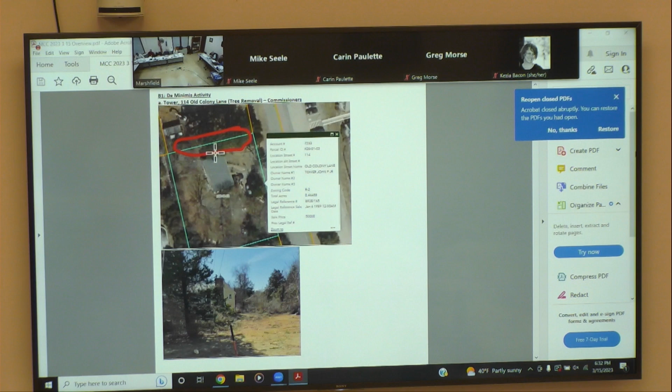First order of business is business item B1, 114 Old Colony Lane. Do you want to present that, Mike? Yep. So a tree service company was on site last week to cut a few tall hazard trees on the property boundary here, as outlined on 114 Old Colony Lane. There were 5 trees, all white pines. They were in poor condition, as I noticed on site. And the only resource area is land subject to coastal storm flowage. There's no tree policy, so this is kind of what we're left with at the moment.

Okay, any discussion among commissioners? I hear none. I'd like to make a motion to accept the de minimis activity of the tree cutting at 114 Old Colony Lane. Can I get a second? Second. All in favor? Aye. Joe is the second, Mike?

Perfect. And the second business item is a fence at 94 Marginal Street. Want to talk about that one, Mike? Yeah, are any of the Dorseys here? Hi, how are you? Would you like to speak about your project here?

Oh well, we're getting to the end, and we just wanted to put a fence down the side of the property line where it's marked in purple there, between us and our neighbor, because we both have dogs, and there's a break where it kind of bends a little bit. Our dogs go in their yard, which is not nice, so I was hoping to put a fence there. Just a 4-foot, not a picket, but like a flat top on it, just a 4-foot fence, down to where the reeds start.

Okay, your comments on that, Mike? I know the commission in the past has issued the 6-inch gap on the bottom of the fencing. The fencing would only be between the properties here and would not be restricting the property to the resource area. 4 feet tall. Check with the building commissioner for all other flood needs regarding the fence.

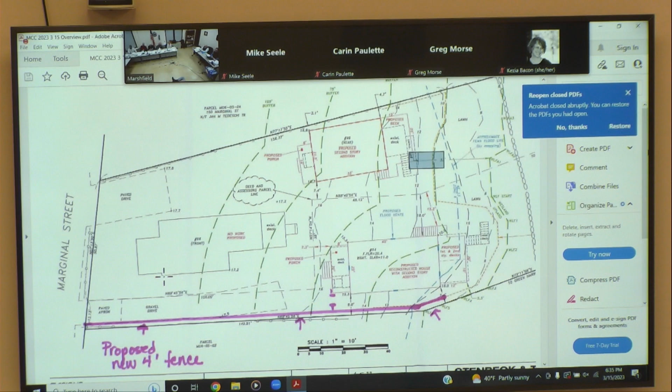Where are you talking about? Really, between the 2 back houses and all the way up to the driveways, everything has been dug up between trucks and trenching and everything else, so we need to reseed it all. It's just going to be a top coat of loam put on it to fill in the divots, and then we were going to put grass seed, but is there any requirement on what sort of grass seed we need? Previously disturbed. Yeah, it's existing lawn area, right? Yes. Okay, all right, great, thank you. Perfect.

Okay, moving into our hearings, we have a number of continuances. First one is 274 Foster Ave, SE 42-2958. They're requesting a continuance until June 21st, 2023. Make a motion. Have I got a second? Second. Second is Joe, all in favor? Aye.

Second one is 17 Oregon Road, SE 42-2990. They're requesting a continuance till April 5th. I'd like to make a motion that we accept that continuance. Have I got a second? Second. All in favor? Aye. Second is Ken.

And the next one is 1184 Ferry Street. I make a motion we continue SE 42-2987 until April 5th. Have I got a second? Second. Second, Joe. All in favor? Aye.

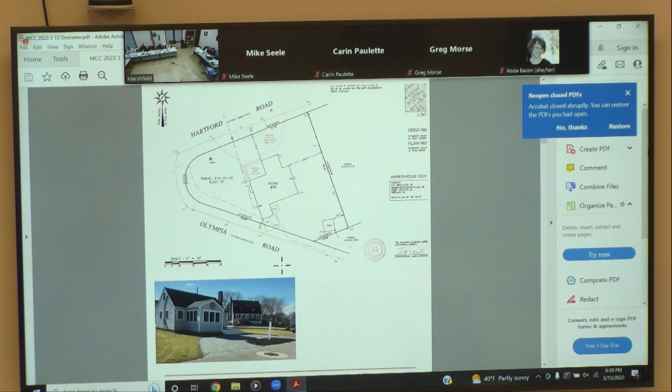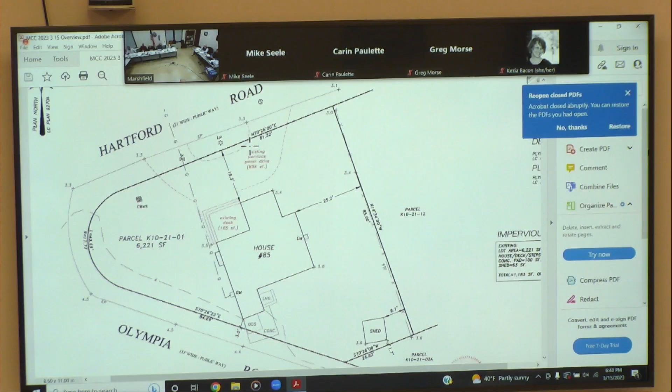You're here to present that, Rick? Yes, I am. I'm the hearing officer. As stated, Chairman, the homeowners here constructed a deck and a paver driveway on the property. They didn't realize they needed a permit for it, but the structures are already in place. The deck is 165 square feet. The driveway is a pervious paver driveway, but it's out there, it's 806 square feet. So they're in place, and he's been working with the building department. They've been through the floodplain permit process, but essentially they're here tonight filing this after-the-fact notice of intent for that unpermitted work. The only resource area we're in is the flood zone. There's no wetlands within 100 feet or any other that I was able to identify, other than the AE9 zone that they're in.

So here we are seeking an after-the-fact permit. Very good, thank you. Mike, your comments on this one? Taxes, fees, abutters have been met. The work is done up to code for the building commissioner, and the only thing they were missing was the permit to start off, and commission approval. So other than that, it looks like a decent project.

I took a quick look by there, lot's dead flat, no issues there. Did we verify their pervious pavers? Yeah, I verified on site that there was adequate gap between the pavers, and there's no standing water on the actual driveway. Thank you for verifying the requirements for abutters and everything. I forgot that. Comments from other commissioners?

I see none. I visited the site, and as Rick described, it's pretty straightforward. Any comments from the public on this one? I hear none. I'd like to make a motion to close the hearing and issue special conditions. Anything outside of the ordinary, Mike? Nope, just the standard special conditions. Very good. Have I got a second? Second, Susan. All in favor? Aye.

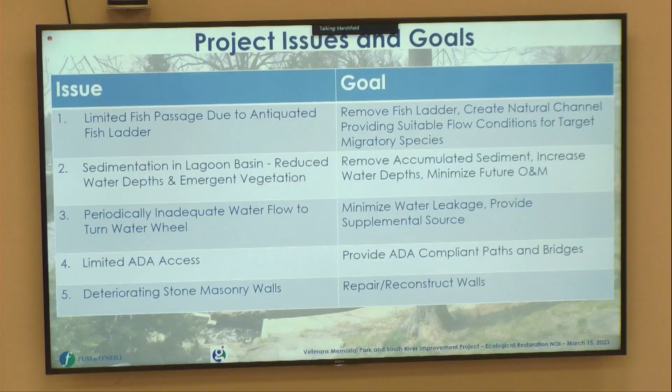So with that, next slide please, and I think Leslie will speak about regulatory.

All right, so as you heard at the beginning and from Bill, this is being proposed as an ecological restoration project. DEP enacted new regulations for ecological restoration projects about 5 years ago, so it's probably pretty new to the commission. In fact, we've worked only on one other ecological restoration project together. We're getting into more of them, but it's been a learning process for us, as I'm sure it will be for you guys.

But one of the things you have to prove before you can present your project as ecological is that you meet the definition within the regulations of an ecological restoration project. That is essentially that you are restoring ecosystems to an area that have been anthropogenically altered. That's the basic definition in the wetlands regulations.

So this project definitely does that, because the dam was put there years ago with the historic grist mill and has impacted the area and the ability of the fish to pass up the river. So I wanted to go through for the commission and describe how this project meets the requirements for an ecological restoration project. Those are presented in the regulations in 310 CMR 10.13(1)(a) through (l).

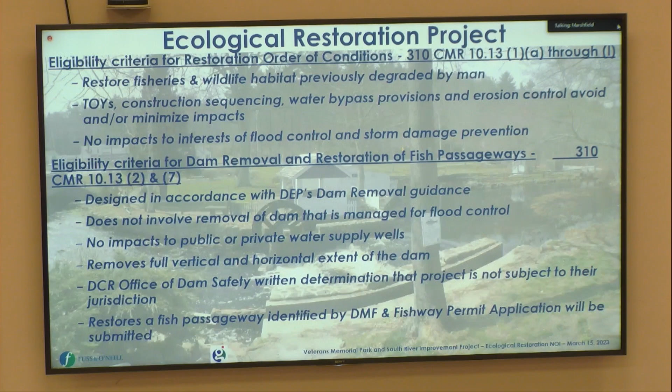Other things we're doing to avoid and minimize impacts: construction sequencing and water bypass provisions that will allow water to flow during all parts of construction, and then erosion control and sedimentation control that will minimize sedimentation into the river. One of the other requirements is that the project can't have any impacts to interests of flood control and storm damage prevention. The project does not propose to alter the water levels in the river to the extent that it would alter the flood control and storm damage prevention of the banks on the sides.

In addition to the general requirements for eligibility for ecological restoration, projects also have to meet specific requirements. So this project meets 2 specific types of ecological restoration project requirements, one for dam removal and one for restoration of fish passageways. I've listed here all the requirements that we meet.

It has been designed in accordance with the DEP's dam removal guidance. It doesn't involve the removal of a dam that's managed for flood control; the dam was essentially put in there for the historic grist mill, not for flood control. There will be no impacts to public or private water supply wells. We are proposing to remove both the full vertical and horizontal extent of the dam.

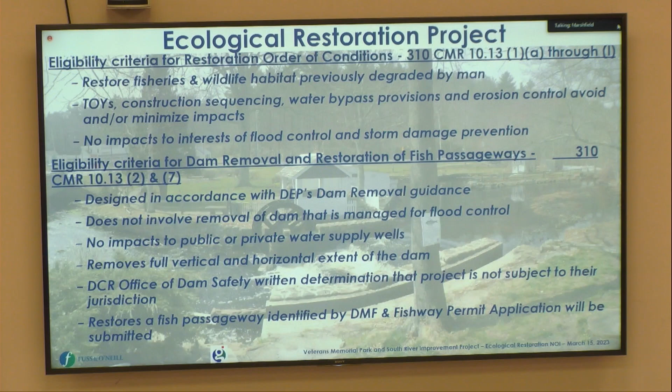We're required to get a written determination from DCR's Office of Dam Safety that the project is not within their jurisdiction. We got that letter, it's part of the application. We're also required to show that we're restoring a fish passageway identified by DMF, which it was, and that we will be filing this fishway permit application. I know that was a long-winded way of describing it, but it's important as a learning tool, and also to demonstrate that this is truly an ecological restoration project that meets all of DEP's requirements, so that you can issue that restoration order of conditions.

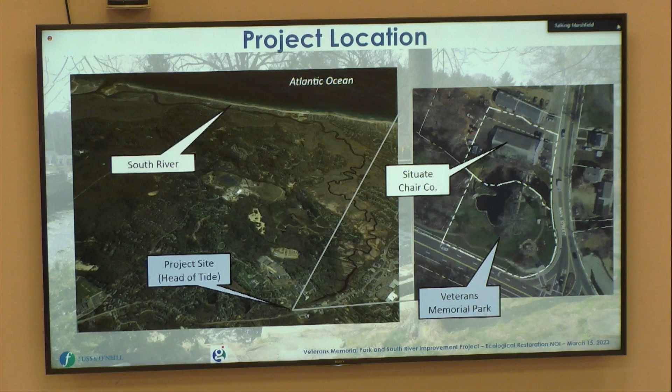Next slide please. Okay, just in terms of orientation, everybody knows where the Veterans Memorial Park is, but you can see it's on the South River, first barrier, coming up at the intersection of Main and Beach Street. Please, next slide.

Okay, so this is an overview of the way water flows through the park. Going from the top left image of the upstream section of the river flowing down, there's a split, and the main channel continues down towards the fish ladder and dam spillway, but there's an uncontrolled lagoon inlet channel where water may flow into the left part of the lagoon, the half-heart-shaped lagoon. It can then flow out of the lagoon in either of two ways, depending on water level and flashboard management by the veterans. It can either flow back into the channel through the bottom of the heart, or it can flow out through an 18-inch reinforced concrete pipe outlet with a flashboard stop log controlled at the inlet at the lagoon.

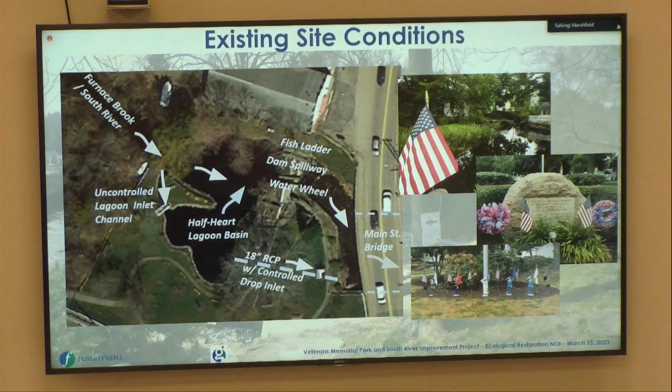Water flowing out of the lagoon and down the river channel approaching the spillway can go over the spillway, through the fish ladder that currently exists on the left bank, or through the flume for the water wheel. Continuing down, everything merges from any of the 18-inch discharge under the Main Street Bridge. Next slide please.

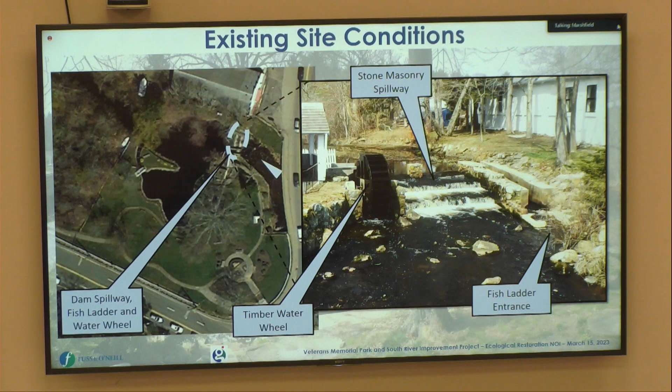Okay, just another orientation to show the configuration of the fish ladder. You can see the fish ladder on the right-hand side of the picture, that's the entrance. It's a very narrow, small, old-fashioned fish ladder, and it doesn't work very well, as we noted. You can see the stone masonry spillway, the tiers of the falls through the spillway, and on the left side, the timber water wheel with the flume in the back of the picture. Next slide please.

Again, just another perspective view. This one was taken during low water, during a drought a few years ago, so you can see the composition of the spillway. You can see the void forming in the portion of the spillway, the stone masonry wall supporting the water wheel. That's an example of the type of deterioration that the project is intended to address, that and other defects and deterioration of the stone masonry wall. So, next slide please.

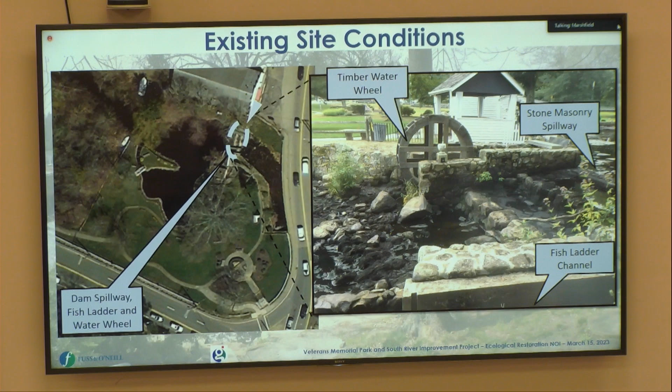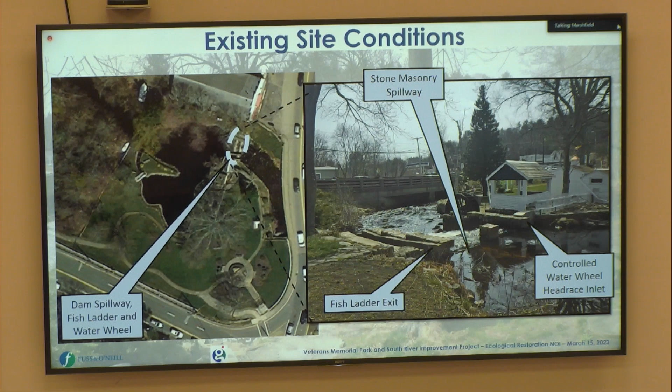Again, just another view looking downstream towards the bridge. Same interface, same controls. There are flashboards currently installed at the spillway to manage water levels during the migration season. The town has been operating those flashboards and water controls that exist now in concert with an operation plan developed by the Division of Marine Fisheries. The veterans are there to implement those controls seasonally and per flood conditions to enable and facilitate the operation to the extent that the fish ladder can pass fish. We've also developed an operation and maintenance plan together for the controls that we've incorporated into our project, which will likewise be implemented by the park trustees, and has also been developed in concert with Brad Chase at DMF. Okay, next slide please.

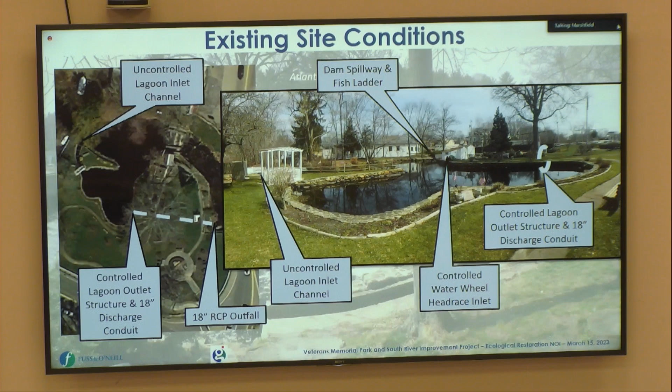Okay, so now just another perspective here visually to show the heart-shaped lagoon. You can see the 18-inch discharge conduit on the right-hand side, the position of the water wheel head race intake, spillway and fish ladder in the background, and the lagoon inlet and white bridge on the left-hand side of that picture. Okay, next slide please.

All right, this slide depicts the wetland resource areas. We essentially have four different wetland resource areas. The areas shaded in gray are land under water bodies and waterways, which includes all parts of the river and the heart-shaped lagoon.

We've got bordering vegetated wetlands, the areas hatched in yellow on the left side of the slide, which are wooded swamp type BVW. Then we have emergent marsh downstream of the dam, near where the river goes underneath the Main Street bridge, that little green hatched area. That's also BVW emergent marsh.

And then we have two types of bank. We've got a coastal bank and an inland bank, and I'll describe that. The coastal bank is that large yellow area on the north side of the river downstream of the dam. That's a coastal bank because that area is influenced tidally during very high tides, spring high tides, and storms, so that part of the system is considered coastal.

The bank areas on either side of the river, and on the north side of that little peninsula where the bridge takes you to that island, those are inland bank areas. There's a sliver of that inland bank that continues along the north side of the channel upstream of the dam. So those are the wetland resource areas we have.

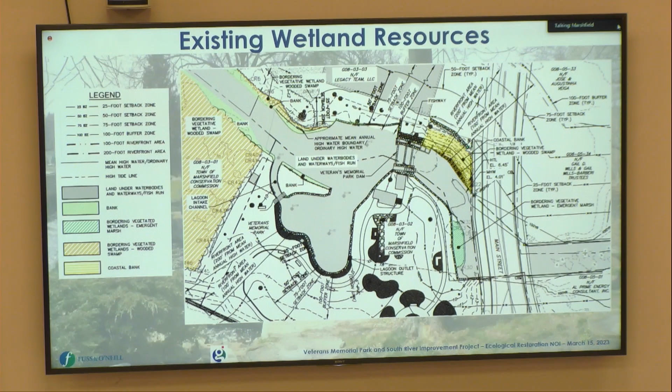Nils is going to talk a little bit about what we're proposing, and then we'll finish up with impacts to these resource areas and how we're going to restore them.

So basically what you're showing is that almost the entire area is within some sort of resource area. Yes, that's absolutely true. We've also got riverfront area, 200 feet from the mean high water—it's on the plan—and land subject to coastal storm flowage. And we've got the buffer zone as well. Thank you.

The reason for showing this is that essentially we're going to have, in the dark green at the bottom, a series of nature-like boulder weirs and pools. The way we design that is to create the flow conditions that will support migration of the target species.

Herring, alewife, and other fish upstream—those fish are able to swim at a certain velocity for a certain distance, and they require a minimum depth of water. So our design approach is to look at the seasonal range of flows during the upstream migration season, from March through June, statistically. We determine the low flow condition, the high flow condition, and through modeling analysis we determine the shape, elevation, and position of these weirs and pools so fish have a resting pool to stop, then migrate up through the next weir, continuing in a stepwise fashion, similar to baffles in a fish ladder, but more efficient.

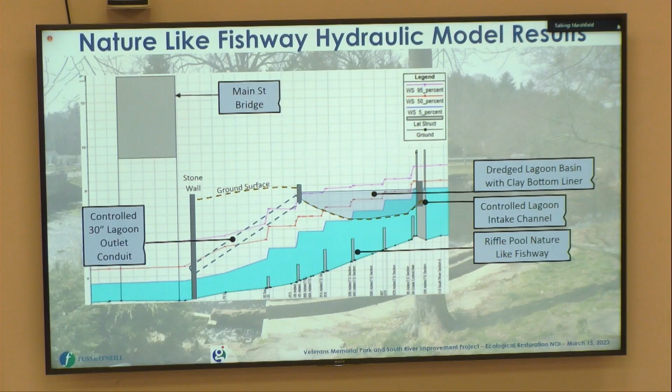Now, I probably should have shown you this one first, but anyway, here's the weir and pool system. We have a series of weirs and pools, boulders nested in there in a random, nature-like fashion, which again provide little places for the fish to stop behind a boulder and rest until it can move up during those higher velocity flow conditions.

As the fish come up the channel underneath the bridge, we want to make sure they're able to get to the first part of the fishway, which is why we created what we call a low flow entrance channel. When we did the modeling, we saw there wasn't an adequate depth of water if we didn't do anything to the river channel downstream of our fishway during low flow migration conditions. So we're shaping that so that during low flow conditions, the fish will have an adequate depth to get to the entrance of the ladder.

We also don't want the fish to get confused by water coming out of the water wheel. We want them to know that this is the way to go to the spawning grounds, and by providing that low flow entrance channel, we'll be able to do that.

So the other element here is that we're introducing a number of flow controls, and I'm going to try to use words to describe what I'm talking about. Otherwise I would point to where it is, and I can stand if it would help—it wouldn't help the people at home.

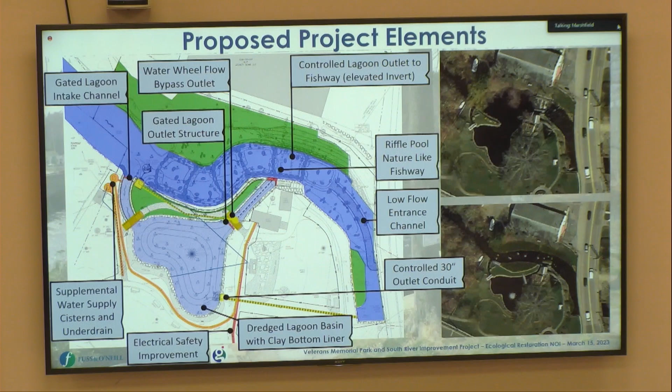Okay, thank you for pointing that out. So this is another rendering we've developed to show what it looks like now and what it will look like in the bottom right. You can see the peninsula gets extended, there's going to be natural vegetation on the banks, and those are going to be seasonally flooded banks. Then, of course, the boulders and riffles coming down through the channel, and the water wheel maintaining its flow. The two bridges are added, and you can see the fountain in the background.

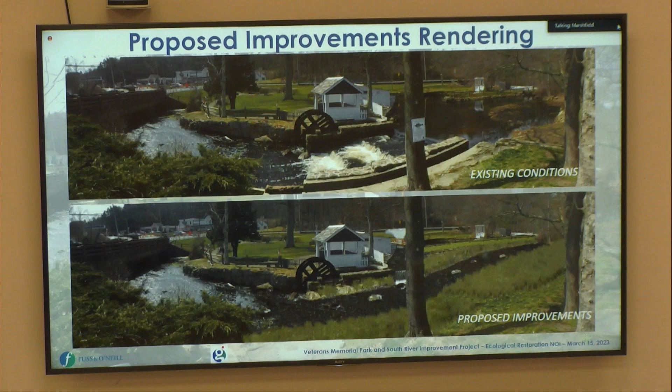All right, so we broke out the project into different elements. We looked at a number of different alternatives to address the issues and goals that are part of the project. For the river restoration and ecological benefits, doing nothing doesn't serve any benefit. Removing the dam and the fish ladder with no fish passage improvements would essentially lower the whole profile of the river, drain the lagoon, and these cultural resources would be lost. So that was a non-starter from the get-go.

Removing the dam and fish ladder and constructing a roughened channel—essentially a different type of channel as opposed to a weir and pool system—you could try to create a bouldery channel that still allows fish to migrate upstream. But when we ran the modeling on that, we found that no matter what we did, we couldn't get the hydraulics to meet the capabilities needed for fish swimming upstream, unless we built this weir and pool system, while also meeting the concerns and needs of the veterans and the trustees. We spent significant modeling time trying to make that work, but it just would not work.

If we're investing millions of dollars to do this project, we want confidence that it will work. We feel very confident in this system—there are many nature-like fishway channels throughout New England, and I could describe them or show you where you can go see them. So that's the first project element, and why we propose this alternative 4.

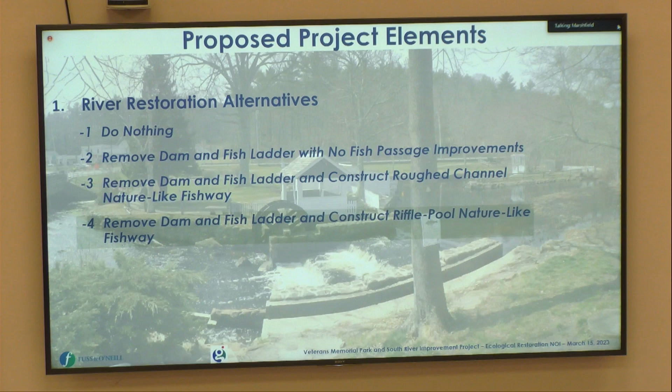Okay, next slide please. Lagoon water conservation alternatives. What I've done here—the shading is a little slight, but those are the elements we've selected for inclusion in the project—these are all things that enhance the ability to conserve water. We looked at them and asked: what are the costs, what are the benefits, what are the impacts, and does it make sense to include them?

First is dredging the lagoon. Of course we want to do that—it'll allow us to install a new liner, and when we get down to item 5 we'll talk about that. When the lagoon is dredged, what do we do with the material? First, we want to put it back wherever we can on the project. That's a beneficial reuse, it's low carbon, and we don't have to haul it anywhere. We can incorporate it into the native substrates we want to create in the river channel and on the banks of the river channel.

We also want to look at where it can be beneficially reused offsite. We've talked to the town and the DPW, and understand that material would be able to be beneficially blended into the composting facility. We've done a characterization of the sediment to assure it would meet the criteria, which it has, so that would be part of the project proposal.

We have, as I noted, replacing the existing and additional water control structures. All of those flumes, gates, and stop log structures are there to allow the trustees to adaptively manage the project beneficially under whatever climate conditions come up.

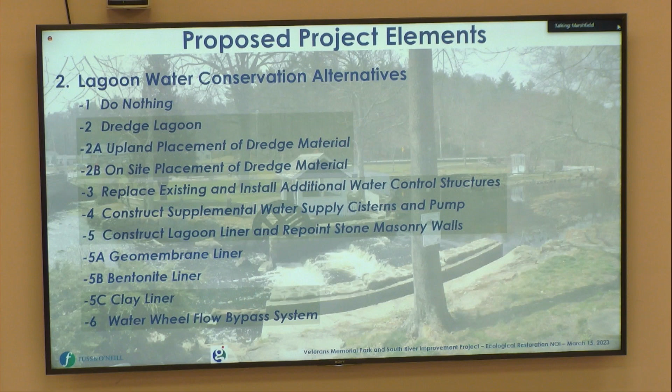When we talk about park access, safety, and aesthetic improvements, doing nothing was dismissed. We want to improve everything, which we did by extending the peninsula, constructing ADA accessible bridges and pathways through this new portion of the project site, repairing stone masonry walls in danger of collapsing, and replacing the outdated electrical system and installing a new primary service electrical conduit while all the construction equipment and resources are mobilized.

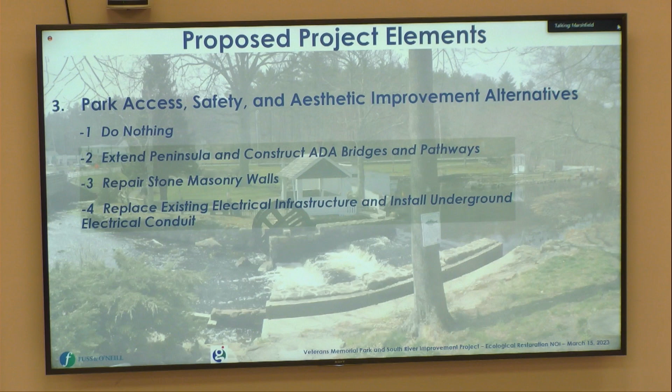This is a couple slides to represent the phasing of the construction to be able to manage the water flows through the river and allow the work to be done in a safe and protective way for the environment. The first phase would entail installing a temporary access causeway with flow bypass conduits. This will be like trap rock or stone placed across the river channel with conduits that allow the flow of the river to go underneath or through this causeway.

With the access coming from the Scituate Chair Company, we've had numerous contacts with them to talk about getting access through their property during construction. They've been very helpful. We've heard their concerns and addressed them in what is being proposed here. So we would come from that side of the project site and drive across this causeway to get to the lagoon and construct all the lagoon improvements.

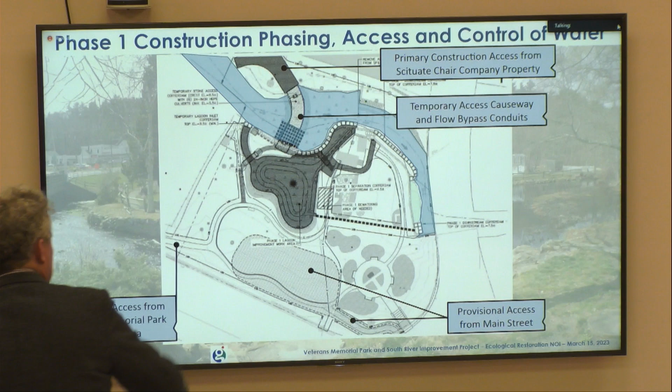With these temporary cofferdams—I don't call them out, but essentially these structures here would be a cofferdam system that would keep the water from flowing up into the areas where the work is occurring.

We have provisional access from Main Street. Again, we want to provide as much redundancy in the access, because we have a very short time of year window. It's very important that the work occurs efficiently, so we're trying to create numerous ways for access, coming in from the existing parking area with protection for the ground, and then from the intersection at Main Street into another provisional staging area. All these areas would be restored to their pre-construction condition upon completion of the work.

This phase of the project would install that 30-inch conduit from the lagoon to the bridge, and it would repair a section of the stone masonry wall that is leaning downstream of the water wheel, which is why we have that cofferdam in that portion of the project site.

Obviously, if there's a flood, the water's going to go over all the systems we have in place. We're going to pull out and come back when the water recedes. This is not intended to protect the site under all conditions—it's simply to assure the work can be done under normal seasonal conditions, and of course not affect the Scituate chair.

So on the next slide, we're going to flip the project over. Now everything has been done on the upstream side, and we're building a cofferdam at the upstream end, putting the water through that flume for the intake to the water wheel, and constructing the nature-like fishway within the river channel itself. We're removing the dam, removing the fish ladder that's out there now, and constructing the new river channel with weirs and pools and bank areas that will allow migration of the target species.

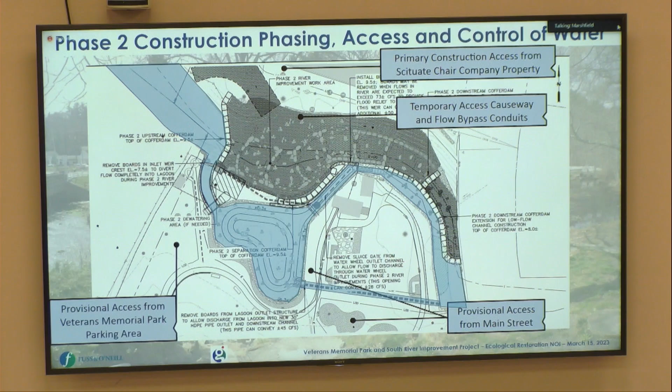All right, we are almost done—2 more slides. Once we've done all the construction that Neil's just described, we want to restore the habitat areas. This slide shows those riparian habitat restoration areas, and we have 4 different areas. The first one is the upper riverbank restoration area.

That's the area shown in light yellow all the way at the top on the northern side, up on the Scituate Chair property. Each one of these 4 areas has a different planting plan designed for the elevations and habitat that particular area will serve. So in that area, we've got red maple.

It's all listed on sheet 11 of the plans. I'll just hit some of the highlights. So red maple, elm, black willow. We've got a number of shrubs, and then we've got a restoration seed mix in that area.

The next area is the riverbank stabilization area, shown in orange. It's on the north side of the river, north of where the dam used to be. In that area, we've got specced out black willow, silky dogwood, a wetland seed mix. As we move further up the bank, we've got swamp rose, conservation seed mix, and another bunch of plants: winter holly, silky dogwood, highbush blueberry, and a conservation seed mix at the upper edge of that slope or bank.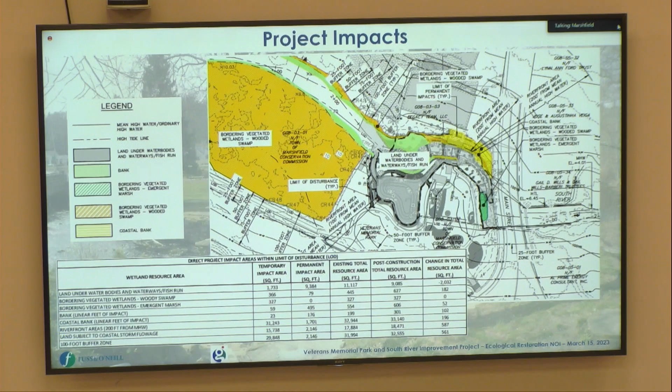And Mike, I think that's the last slide. Do you agree? Yes. Yep. Okay. All right, thank you. So I'll open it up to questions from the commission. Great.

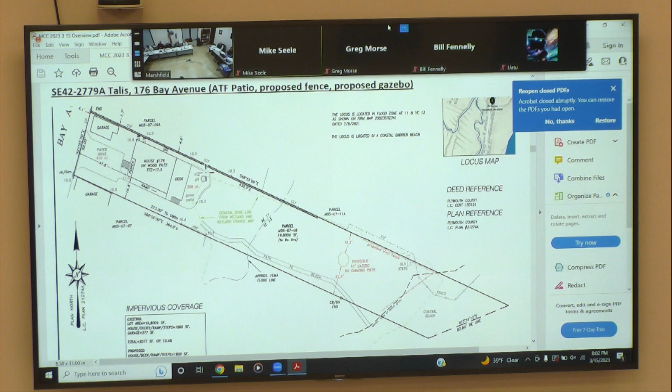We're amending the order to include this paver patio that was put in behind the deck. There was a fire pit on top of this paver patio that's out there. I understand it's pervious. We quantified that area at 568 square feet. It wasn't, I guess, part of the original permit for the construction of the home, so that has been put in place.

That's the area. As part of amending this, Mr. Talis thought, while we're at it, he wanted to propose this gazebo out to enjoy the beach views, and a section of fence out by the edge of Burke's Beach, to kind of supplement an existing fence that's already out there.

The gazebo, as you can see, is positioned on the lot in that fashion. It's a 10-foot diameter gazebo, set on diamond piers, as shown on the plan. The section of fence is also in red. It's a proposed vinyl fence that runs along the northerly boundary line opposite the gazebo, then runs southeasterly towards the beach, and then cuts across.

The purpose of that is dual: to protect the dune and also keep people from coming up from the beach and going onto the property, which seems to happen quite a bit in the summertime—people walk through there and do different things. So essentially we're hoping to amend the existing order to include the paver patio, and the applicant is hoping to put this gazebo in there. You've got the resource areas outlined on the plan with all the coverages. We're both here to answer any questions you might have.

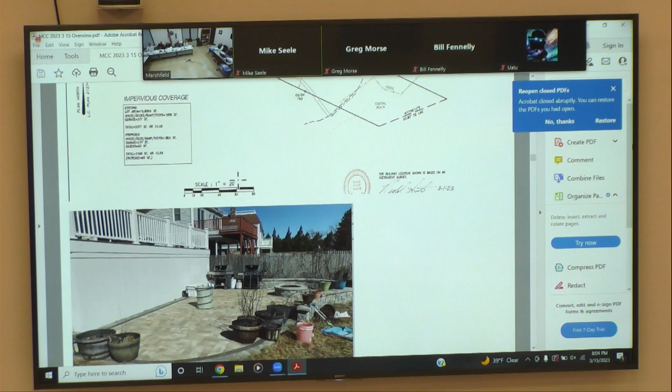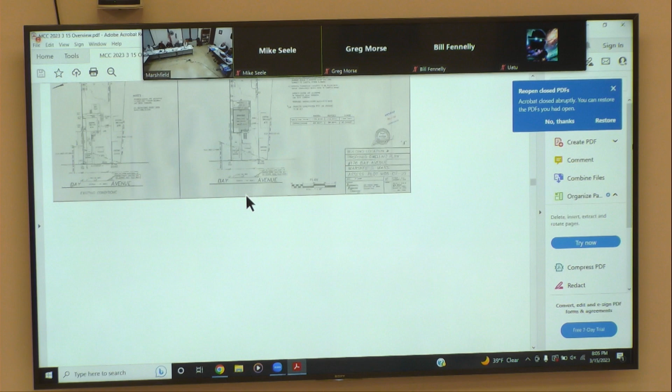Okay, thank you, Rick. Your comments, Mike? Yep, so this is located in a Barrier Beach coastal dune type environment. This was originally the site plan that was approved, from the original permit there—I believe it says 2018, 2016. But here are some site photos from the actual area.

From my understanding, this is the approximate location of the proposed gazebo. The snow fencing would be in front, towards this—this would be the beach out here, with my back towards the home. So this would be the approximate area for the gazebo.

Yeah, leave that stake there, Mike. Come down to that photo. Scroll down once again. That stake there with the flag on it, to the left—that's the stake that was placed for the gazebo position. That's actually the boundary—oh, forgive me, that's the boundary. Okay, yeah, it would actually be over to the right.

Behind, there are some lobster traps that I think might have washed up during Hurricane Bob in 1991, but it would be set back beyond that at a higher elevation. Yeah, boat, right. And this is the patio in question for the after-the-fact permitting.

Okay, Mike, could you go back to the original approved drawing? Yep.

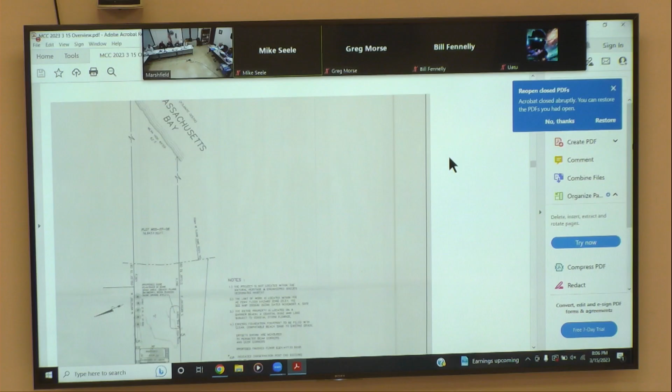So this approval was for the patio we just saw? No, this was for the raise and replace of the house, including the patio. Was it a complete new house, or did you raise it? Yes, what happened was, I bought the property in 1984.

In January 2018, we had a very cold snap. I was staying with my late wife at Brigham and Women's Hospital. All the pipes burst on the second floor. So after she passed away, I moved forward and basically built the house on the same footprint as the 1984 house.

My understanding from the builder was that it would include the patio. The construction project was horribly protracted, and in the end subcontractors weren't paid. I installed that patio area in July of 2021, not realizing it wasn't part of the original plan. So that gives you 3+ years of protracted construction.

I came into the board and met with this board on June 1st last year. I had spoken at length with Mr. Grafton. He had asked me about permeability, and very unscientifically, I took a hose, hosed down the patio area, and videotaped the water seeping through, so he was satisfied the permeable surface was not going to damage the environment.

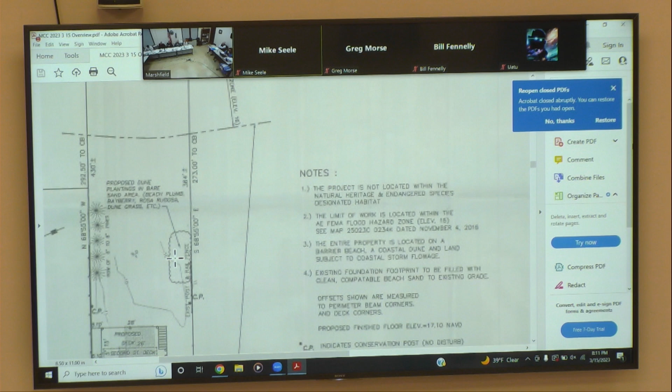And then the final thing about the old plan - Mike, if you can scroll down just a little bit, there was a proposed planting. I think I'm the only one on the commission from the time you were in here for the original plan, but I don't recall - was that restoration plantings, or what was that? I honestly don't know what the builder did, but Bill Grafton did ask, would you be willing to do plantings?

Since I fashion myself as somewhat of a farmer, and I've got some beach plums out there, I certainly would do whatever plantings were suggested to me, because it is a beautiful area and I do love it. Right now I grow my tomatoes in pots. I believe we had him do those restoration plantings. Oh okay, you were in on that, Joe?

So I think I myself am satisfied with the tree issue.

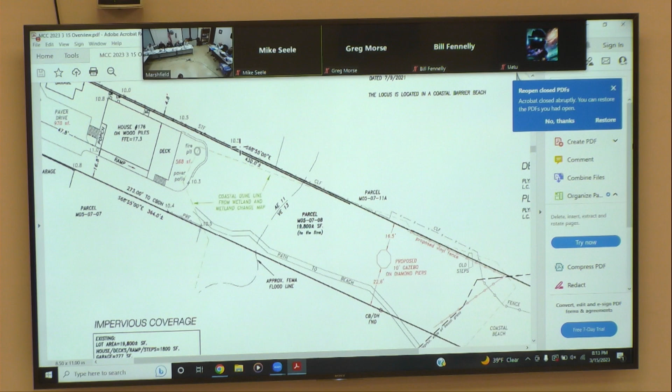Rick, if you went to your plan, where is the patio in relation to those conservation posts? If we could look at that, Mike. That data, I don't believe it's beyond them, but I think they'd be very close. They're not in place. I'd have to do a little scaling to verify that, but they'd be close to the edge, just looking at it. I'd have to do some actual survey measurements to say for sure, but close.

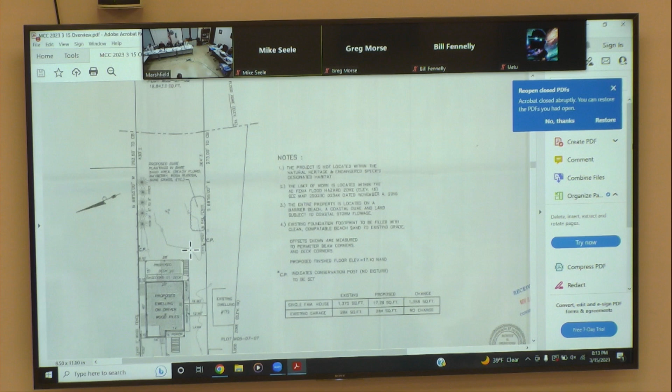Where those are located on the property line, or if we could go back to that real quick, Mike, the original plan. I do know that the house, as proposed, is in about the same position as that. So yeah, that one on the left side, that would probably be within the limits of the marker, part of the patio, very close. Maybe both of them. Okay, so it's either beyond those or very close to it.

I think the bigger issue is the gazebo. The fact that we called out conservation markers, when the work was done before, that would be a no-touch area. So particularly when you see storm damage right in the area where the gazebo is proposed, I would not support the gazebo. I could perhaps explain that the gazebo itself is retained further back than if you were looking at the ocean from where you're looking. You have a seawall, and it's retained further in from the seawall, further in from a non-permeable fence that was placed by a neighbor, and further in from her gazebo and tile.

So it's really very much pulled in beyond that particular line, including the construction line of the new home, 4 houses down from me, which is being built about 40 feet beyond the line of homes along Bay Avenue. So it's pretty much restrained. Also, one of the things I wanted with the selection of the gazebo is it's octagonal. It's only 10 feet, so it's a small gazebo too.

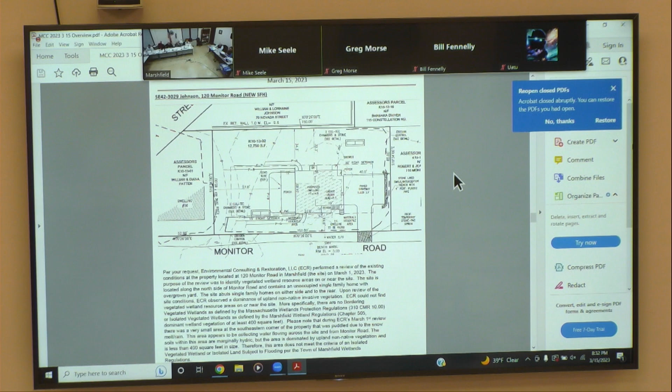Correct. So why don't you talk about the project, and then if there are any questions, we can get into that. So we're in land subject to coastal storm flowage. There's an existing dwelling there that was destroyed by fire a number of years ago. The applicant wishes to raze that and rebuild another modest single-family home in the general vicinity, basically moving it so it conforms to the zoning setbacks. It's raised up out of the ground to get the first floor out of the floodplain. It's a stepped foundation that's got to be constructed in conformance to all the FEMA regulations as far as flood vents and all of that.

We are proposing a little bit of fill material in the front just to reduce the number of steps into the porch. We're providing two Cultec systems to handle the stormwater from the roof runoff. We're proposing a stone-pac apron to protect the public way as we're getting in and out during construction. We're proposing an erosion control barrier around the property to protect the abutters down gradient, as well as prevent any material from getting into the street. We are proposing a paved driveway, pitched into a drainage swale with a small berm to prevent any runoff going onto the adjacent properties. That's about all I can think of.

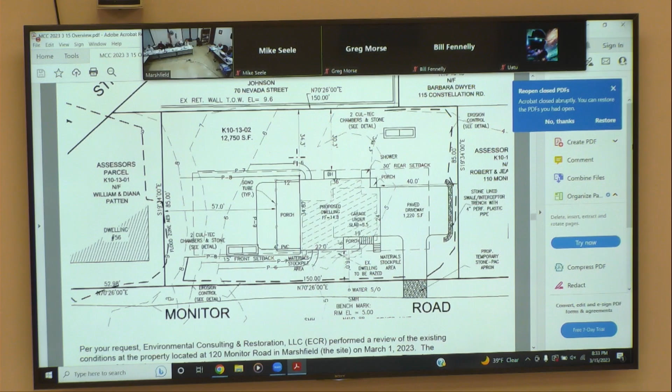Okay, any questions? From our perspective, Mike, do you have any comments on the site? Not particularly, just raising and rebuilding a fire-damaged house. Per site visit, we saw what looked like potential isolated vegetated wetlands. Brad Holmes with ECR Consulting confirmed it was less than 400 square feet, and the vegetation did not meet the standards of being considered wetland, which I agree with.

So it's a very small area to the front right corner of the property, approximately this location. And the property has a floodplain permit on file, so I know Andrew's all set with that. I know that Andrew, the building commissioner, had some questions about some flood openings.

Can I speak? I met with Andy the other night, and I also sent the notes he made back to my architect, and she has already taken care of all the floodplain openings. Our structural engineer actually had that in his plan already. That she hadn't put in, but he had done that, so she's already changed it.

Okay, so I think from our perspective, the Conservation Commission perspective, I think we're good to go. I think the building commissioner just had some questions, and you're working with him to resolve those, which is beyond our purview. So Mike, do you have any special conditions that we want to add?

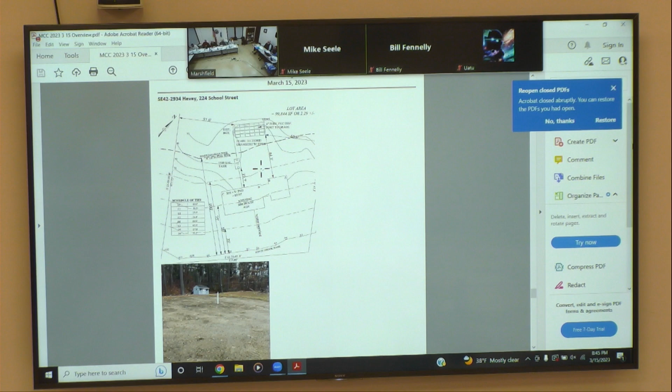Make a motion to issue the certificate of compliance for 224 School Street. Got a second? Second, Ken. All in favor? Aye.

I'd like to make a motion to table SE 42-2976, 106 Preston Terrace. Second? Still waiting for input on that? Yeah, second, Susan, jump right in. All in favor? Aye.

Next one, 42-1074, 36 Old Ocean Street. No further information on that? Rick, were you going to speak on this one? Yeah, actually, that's why I was hanging around now. Did you get the revised plan, Mike, that I submitted for this?

Yes. So I've been working with the homeowner who is now living out of state. The house is still for sale, the property is still for sale. She does still come and go, but she's been away from work. At any rate, we're trying to get this certificate of compliance closed. I know the issue from before was there was a shed on the property that wasn't permitted. There were two old orders on this place that predate all of us on this property.

I think it was like SE 100 and 200, one might have even been under 100. Mike had told me the shed was an issue on it, possibly the driveway was a little bit bigger too. The shed has been removed from the property, it's gone altogether, and it was actually gone when I submitted the last plan. I realized that it was gone, so I had shown the shed on the plan, but it's now been removed.

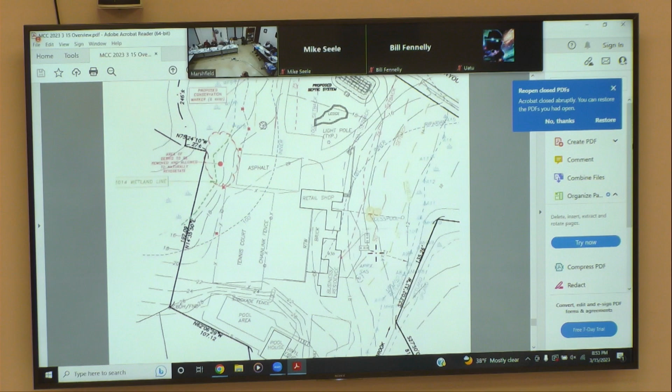But those are new tanks that are going in right there on the side of the house as part of the system. Yeah, for the same reason you've indicated these markers, where you have them, get them in the other areas too, I think. Okay, great idea. I'd be happy if you did it to Mike's satisfaction. Perfect. Other commissioners would, oh great, good idea, go for that.

So we really can't take a vote, so we'll just table this. They have to get this done - you can talk to your client, revise the as-built. We're not gonna be able to sign off on this certificate of compliance until we get some stuff in there, add some more markers on the other side. And it seems like we're in a good position once we get all that work done.

Okay, yeah, I'll work with that, Mike. I'm kind of in between - we'll make a motion to table. Do you think you'll be April 5th? You want to come back, or give it some time? I think we need to go for that April 5th, and if I have to continue it, I'll continue it, but at least there's a possibility for that night if there's any way I know we get the markers in.

Okay, I make a motion to continue 36 Old Ocean Street until April 5th. Do I get a second? Susan? All in favor? Aye. All right, thank you very much.